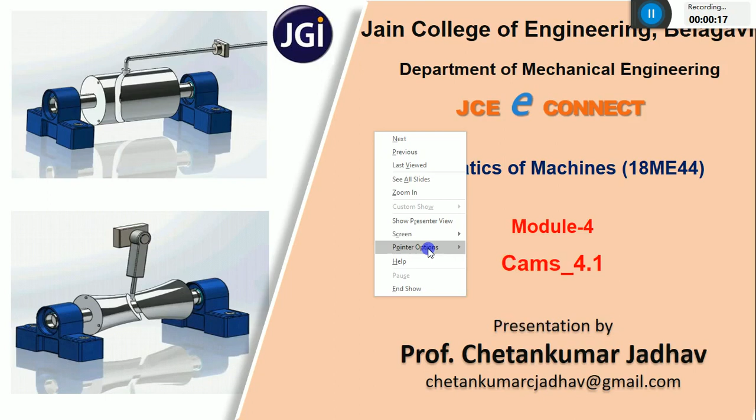Students, today we are going to start with the fourth module, that is CAMS, and this will be your first lecture on module number 4. In this, we are going to discuss the definition of CAM follower, and after that, a detailed classification of these CAM and follower.

So you can see, towards the left side of the screen, these are examples of cam followers. You can see this cylindrical element which is rotating, which is having a groove, so it is one type of a cam. And you can see one more element which is reciprocating in left and right direction, which is nothing but a follower.

Here also you can see this image, it is also an example of a cam and follower, but the shape of the cam is in the form of a concave shape with one groove, and with respect to that groove there is an oscillating element, which is nothing but a follower. So in the first image the follower is reciprocating, and in the second image the follower is oscillating.

Based on different criteria, based on the type of motion of the follower or the shape of the cam and follower, we are going to discuss different classifications of these cam and follower. Okay, let me start with today's lecture.

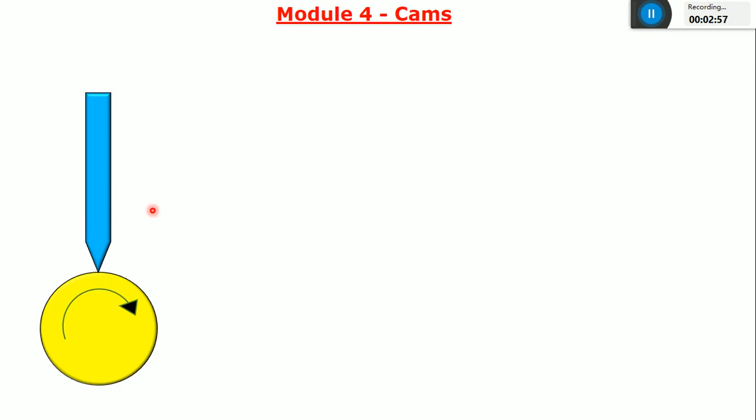Just tell me, what happens if element 1 starts rotating - will there be any motion of this follower? Since the shape of this element is circular, and element 2 is in contact with this circular element, there will not be any movement of this follower. If you give an input to element 1, it will start rotating - the input motion is rotating type. But what about the output? There will not be any output, or motion of this follower, because the surface in contact with the first element is in the form of a circle.

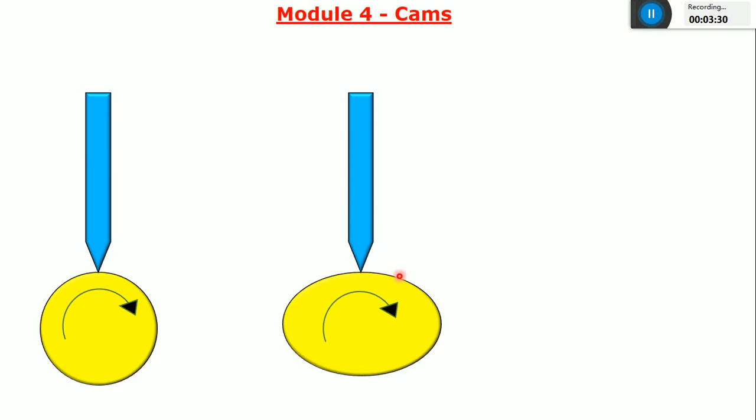In the second image, instead of a circular element, I'll consider an elliptical element. It is also connected to a motor. Again I'll consider this as element 1 and this as element 2. In this case, when element 1 starts rotating, due to the non-circular nature of this element, the follower starts moving in upward and downward direction.

Just consider one point, point A, on this elliptical element. As element 1 starts rotating, this point A moves towards the follower - I'll call this the cam and this the follower. As the cam starts rotating, point A starts moving towards the follower, and due to the non-circular nature of this element, the follower starts moving in upward direction. As point A starts moving away from the follower, the follower will come down.

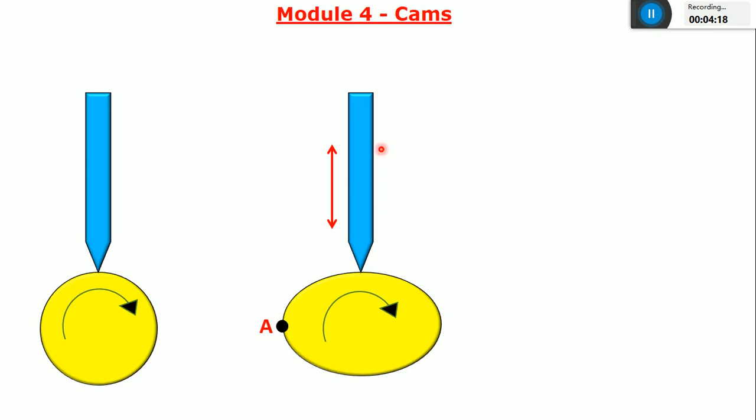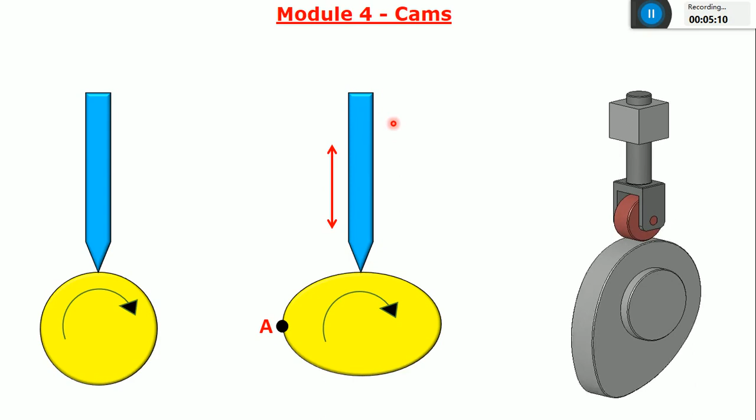As point A starts moving towards this follower, the follower will move upward. As point A starts moving away from the follower, the follower starts moving downward. So this is nothing but a cam and follower - I can call this the cam and this the follower.

So whatever you saw in the first image is not an example of a cam and follower, because the shape of that element is circular, and as this circular element starts rotating, there will not be any movement of the second element. So I cannot call that a cam and follower. If you want to call something a cam and follower, there should be some input motion and there should be some output motion.

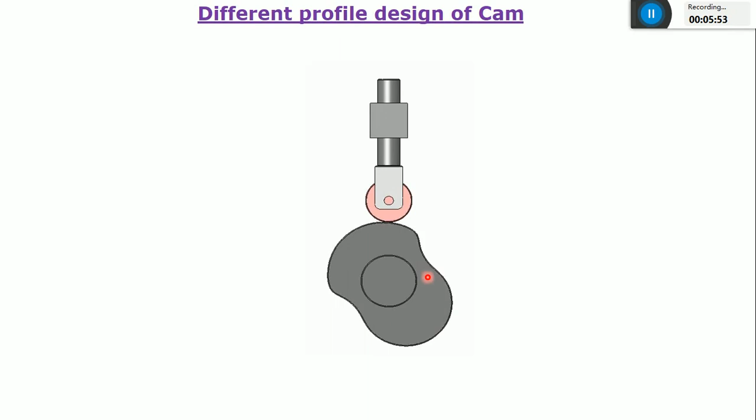So based on the applications and based on the output motion you want, you are going to design the profile, the design of this cam. That is the intention of studying this module number 4. These are the different profiles or designs of a cam based on what output motion is required, what is the speed of the follower which is required.

And if you want a continuous motion of this follower, or in between you want some rest, you can see the follower in the first image will move in upward direction, again come down, take rest, again move up, down, take rest. But in the second image there's a continuous upward and downward motion of the follower. So based on the requirement of the follower, you are going to design the shape of the cam.

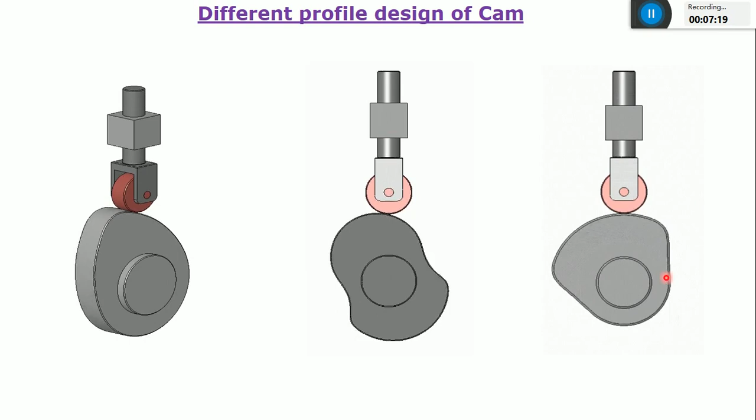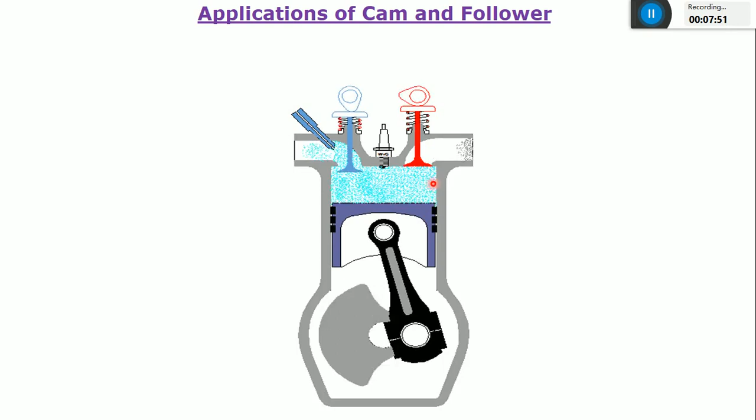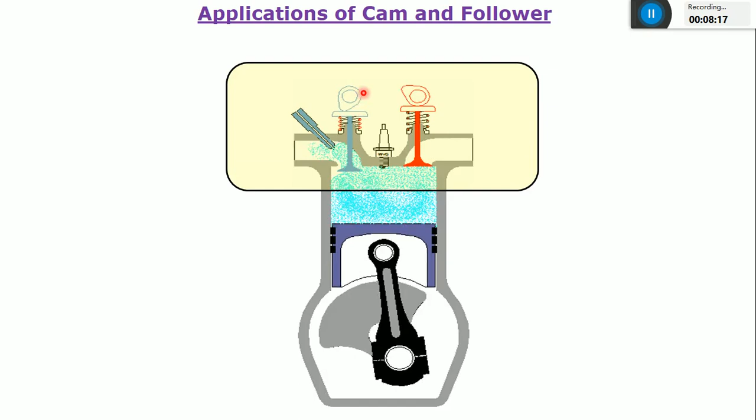So these are the inlet port and outlet port, controlled by the inlet valve and the exhaust valve. And the movement of this inlet valve and outlet valve is in turn controlled by a cam and follower. You can see in this highlighted portion this is nothing but a follower and this is a cam. Again this red colored one, this is also a follower and this is also a cam.

During the suction stroke of this IC engine, the inlet valve will be opened, and at the last stroke, the exhaust stroke, the exhaust valve will be opened. It means you are controlling the motion of the inlet valve and exhaust valve with the help of cam and follower. This inlet valve acts as a follower and this is the cam. The application is to control the movement of the inlet valve and exhaust valve as per your requirement. You can set the timing when it has to be opened and when closed. So this was one application of a cam and follower.

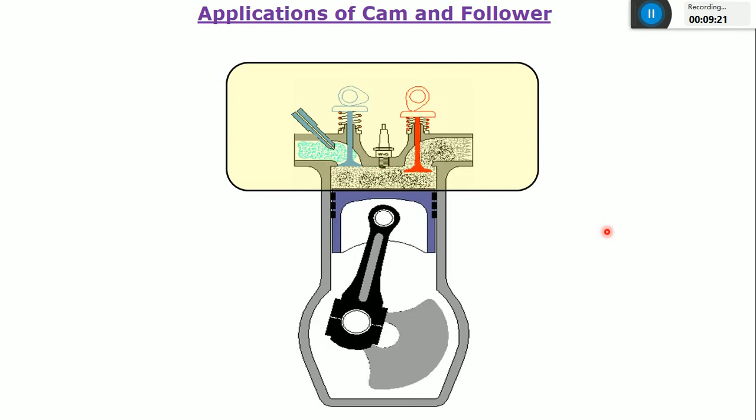There are so many applications of a cam and follower, you can search in Google. In the textile industries, in spinning machines, and in automobiles also, in aeroplanes, and in controlling the feed mechanism of an automatic lathe. All these are applications of cam and follower to control the motion of different parts.

Then after this we'll see what are the different types of motions of the follower. This is nothing but a cam which is connected to a camshaft, and this is a follower. Since the shape of this follower is in the form of a roller, I can call it a roller follower.

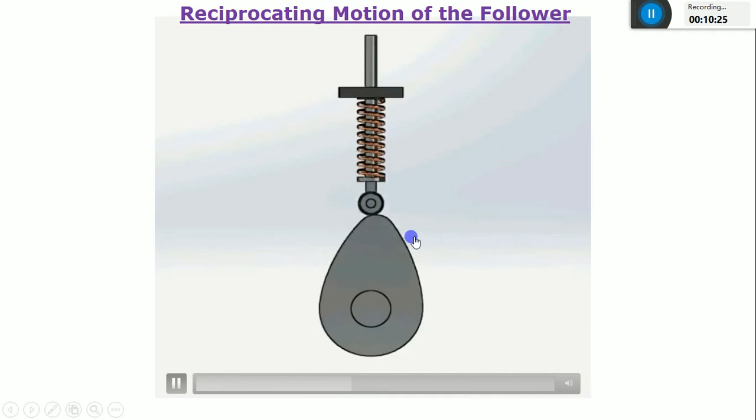Let me show the animation of this cam and follower and why it is called a reciprocating motion of the follower. Just watch this video. The input motion is a rotary path and the output is reciprocating type, the follower moving in upward and downward direction. Since the output motion is in the form of reciprocating type, I can call this particular type reciprocating type cam and follower. Just mainly concentrate on the output motion, what kind of output motion you are seeing - it is in the form of reciprocating type.

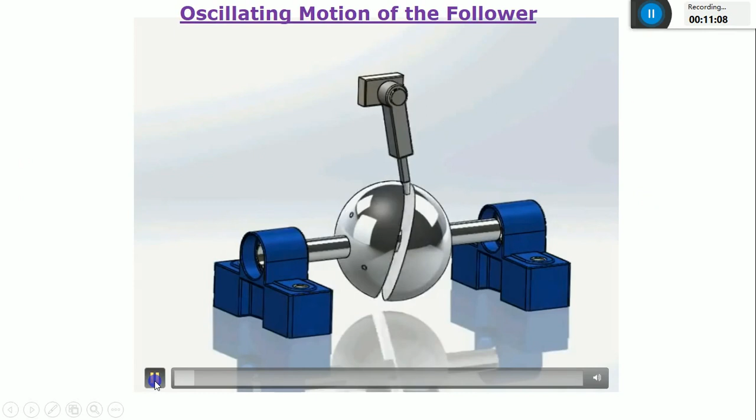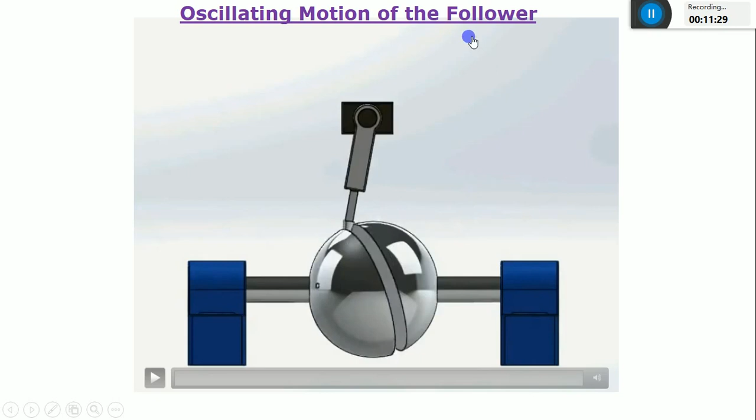I'll consider one more image, also a cam and follower. Just try to concentrate on the output motion, how it is. Just watch this video. The input motion is a rotary path, and the output motion is oscillating type - the follower is oscillating, moving from left to right and right to left. So this particular type of cam and follower is called oscillating type cam and follower. I wanted to differentiate between the reciprocating type and the oscillating type, so that I can define exactly what a cam is.

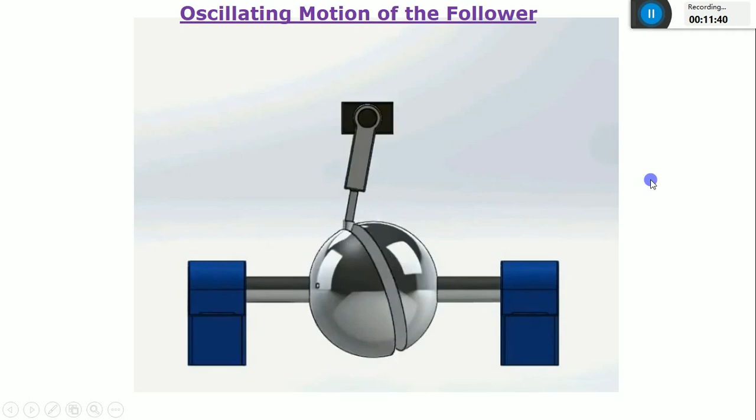So we'll go with this definition of cam. After seeing all these animations, I can see that a cam is a rotating machine element which gives a reciprocating or oscillating motion to another element known as follower. The cam is a rotating machine element which gives a reciprocating or oscillating type of motion to another element. This other element is nothing but a follower. This follower is going to follow this cam. You give the input motion to the cam and the output motion you get from the follower.

And what are the features of this cam and follower? The first one is the cam and follower have a line contact or a point contact and hence form a higher pair. If there is a line contact between two kinematic links or elements, I can call it a higher pair. In this animation you can see the type of contact between the cam and the follower is a line type, so the type of pair is a higher pair. This is one of the features of this cam and follower.

And one more feature is that the contact between the cam and follower is always maintained with the help of a spring force and the self weight of the follower. In this animation the spring is not visible, so I'll show one more animation so it will be clear.

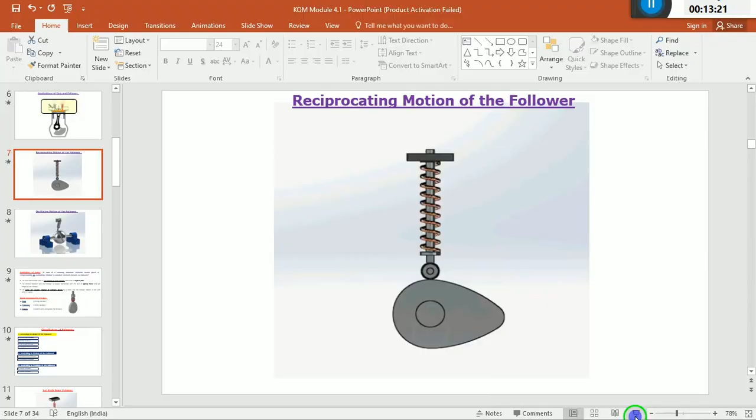You can see in this slide the reciprocating motion of the follower. The contact between the cam and the follower is maintained with the help of a spring force. There is a spring attached to this follower, so that I can maintain a constant contact between the cam and the follower. That is the use of this spring force.

You can see the cams are usually rotated at uniform speed. From the animation you can see the motion of this cam is uniform, moving with uniform speed. But the follower motion is not uniform speed. The follower will not be moving with a constant velocity. Sometimes it will be moving at 5 centimeters per second, sometimes it will be at rest, sometimes it will be 1 centimeter per second.

It means the cam will be having a uniform speed, but in the case of the follower it is not uniform. After that, what are the basic components of this cam? The cam and follower has three basic components. The first one is the cam, which is nothing but a driving member, since the input motion is connected to this cam. The second element, the follower, I can call a driven member, because the motion of this follower is controlled by the cam. Hence the follower acts as a driven member.

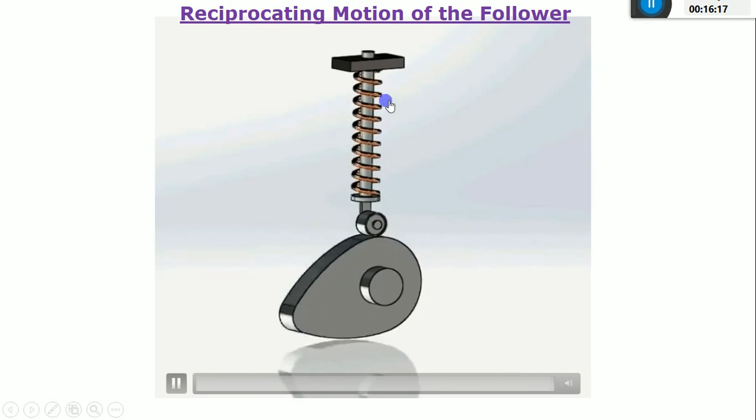And these are the features of this cam: the cam and the follower have a line contact, and the contact between these two is maintained with the help of a spring. This cam rotates with uniform speed, but in the case of follower it has a non-uniform speed. And these are the three basic elements of this cam: the first one is the driving member, the second one is the driven member, and the third one is the supporting member, which acts as a guiding element.

And if you want to see the actual image of this cam and follower, I'll open this PDF.

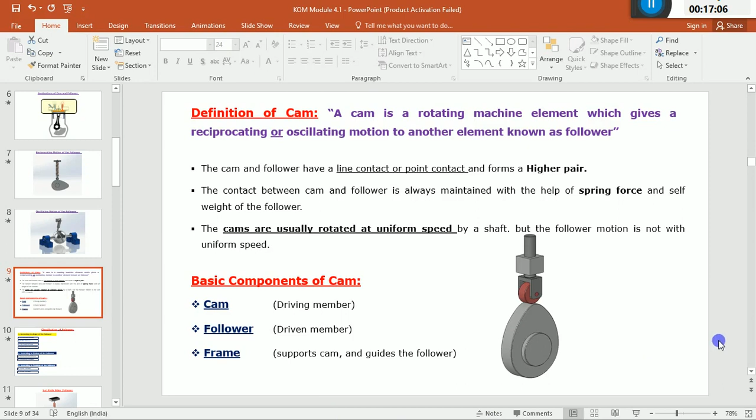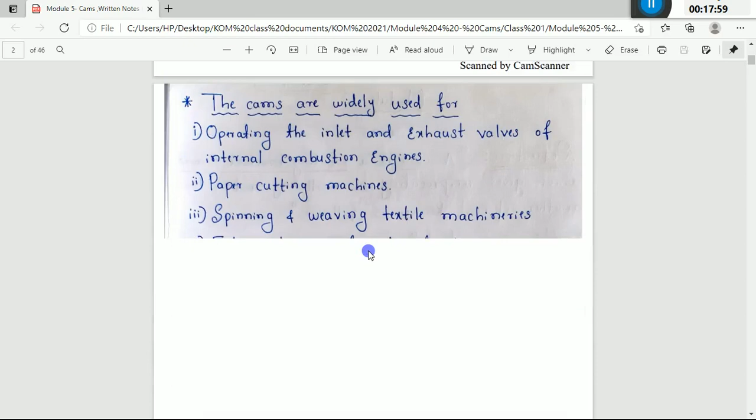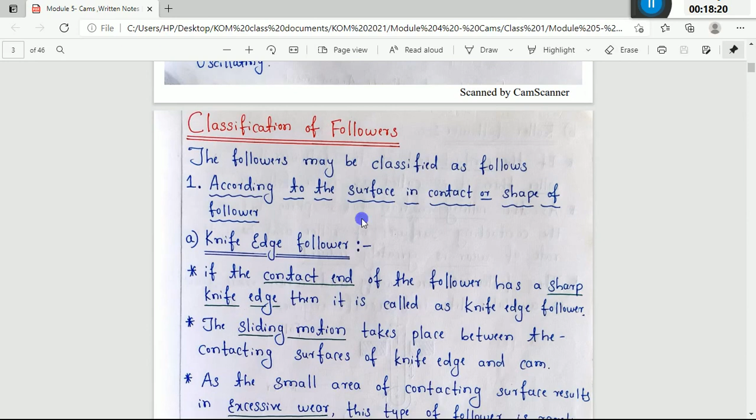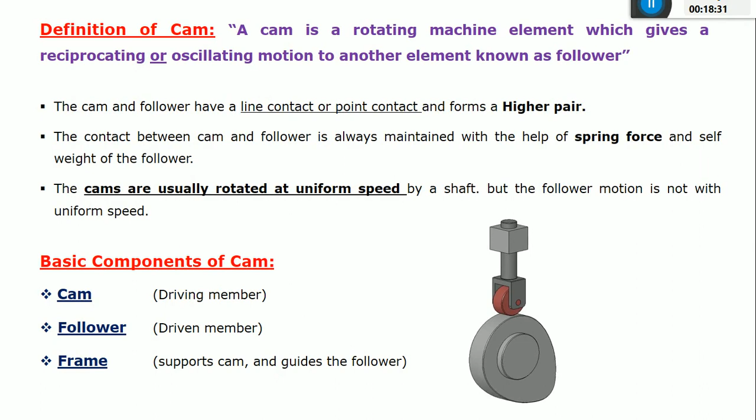Students, just note down different classifications of the follower. According to three criteria, I'm going to classify the followers as a knife edge follower, a roller follower, a flat faced follower, and a spherical faced follower. So all this comes under classification according to shape of the follower.

Based on what is the shape of the follower: if it is a knife edge, I'll call it a knife edge follower. If it is a roller, I'll call it a roller follower. And if the shape of the follower is in the form of a flat face, it will be the flat faced follower. And if it is slightly spherical shape, I'll call it a spherical faced follower. Please note down these classifications so that in the next slide I'm going to start with this knife edge follower.

So first I'll go with the knife edge follower. I'll show some animated videos so that it will be clear. Just take 30 seconds and note down the different types of followers based on three criteria: first, according to shape of the follower; second, according to the motion of the follower; and third, according to position of the follower.

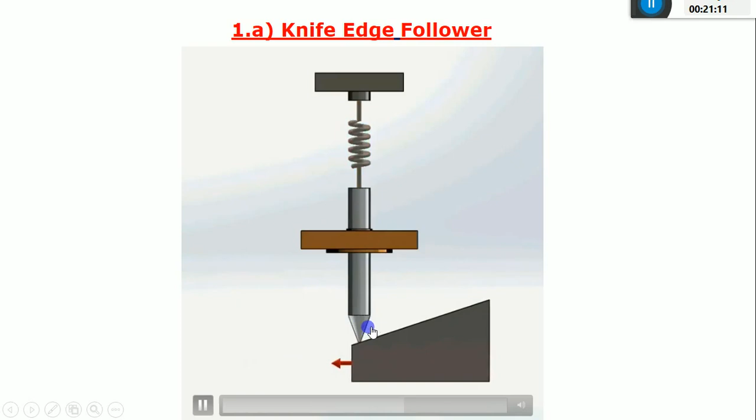You're seeing the input motion is reciprocating, the output is also reciprocating. Why is it called a knife edge follower? Because the shape of this follower is in the form of a conical shape or a knife edge. So I can call it a knife edge follower. It means if the contact end of the follower has a sharp edge, then it is called a knife edge follower.

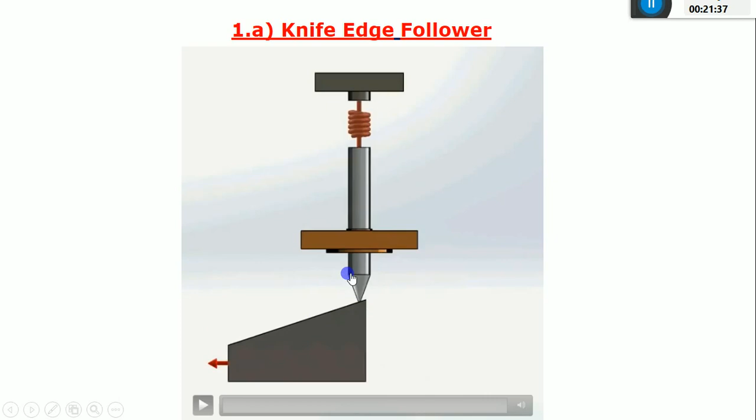And you can see the sliding motion takes place between the contacting surfaces of the knife edge and the cam. There is a sliding motion between a follower and the cam. And since it is having a knife edge, there may be chances of excessive wear, because as a small area of the follower is in contact with this cam, there are chances of wear and tear of the cam as well as the follower.

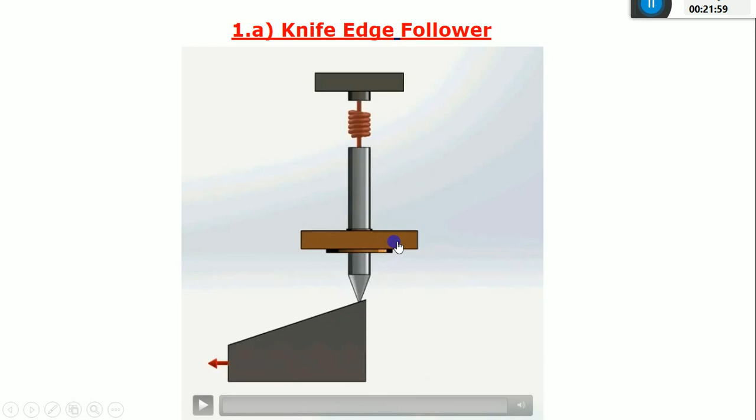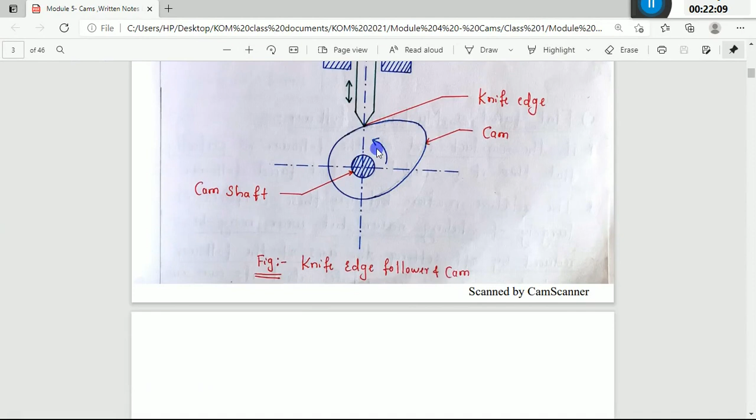And if you want the actual image of this knife edge follower, you can go with this one. In the examination you can draw this one. So this is nothing but a cam, connected to a camshaft. It may be rotating either counterclockwise or clockwise. And to this cam there is a follower which is in the form of a knife edge, so I can call this a knife edge follower.

And the type of contact is a point contact. Since it is having a sharp edge, there may be wear and tear of this cam profile, cam surface. Again, the type of input motion is a rotary path, and the output motion is reciprocating type. So this is the first one. If you want, you can take this image, otherwise after the class I'll share this PDF in the Google Classroom.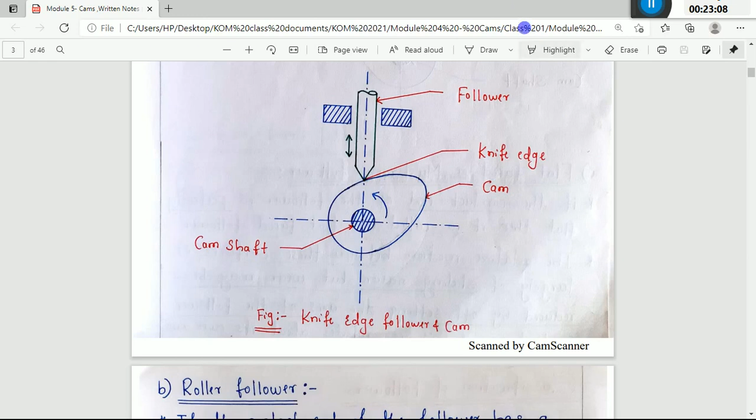After this, I'll start with the next one, that is a roller follower. You can see in this image the type of follower is in the form of a roller.

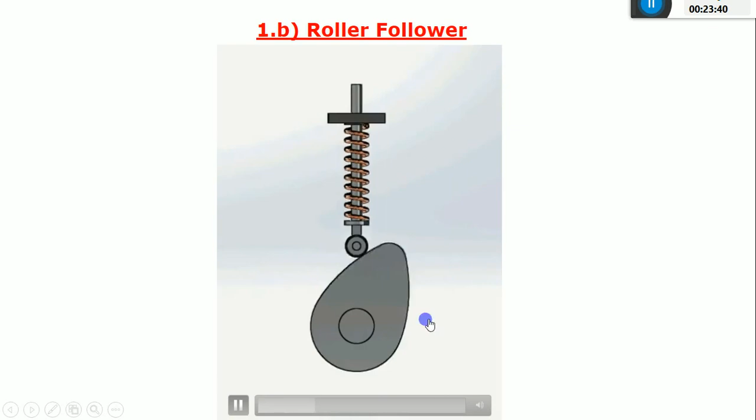First I'll show the video so that it will be clear. Again, the type of input motion is a rotary path, and the output motion is a reciprocating type. But the difference is the shape of this follower is in the form of a roller. It means if the contact end of the follower has a roller type, then it is called a roller follower.

Compared to the knife edge follower, the wear and tear is less, because the type of contact is in the form of a line contact, and it is having a roller shape. The wear and tear of this roller follower and the cam is less compared to the knife edge follower.

These followers are widely used in aircraft engines. These roller type of followers are used in aircraft engines.

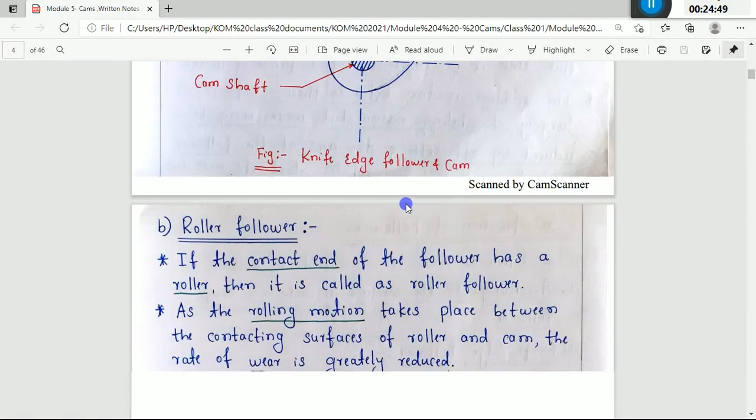If you want the actual image, the schematic image of this follower, you can see in this image. So this is nothing but a roller type of follower. Again this is a cam, and this is a camshaft which is connected with a motor, and this is the follower, and at the end of this follower there is a roller which is in contact with this cam.

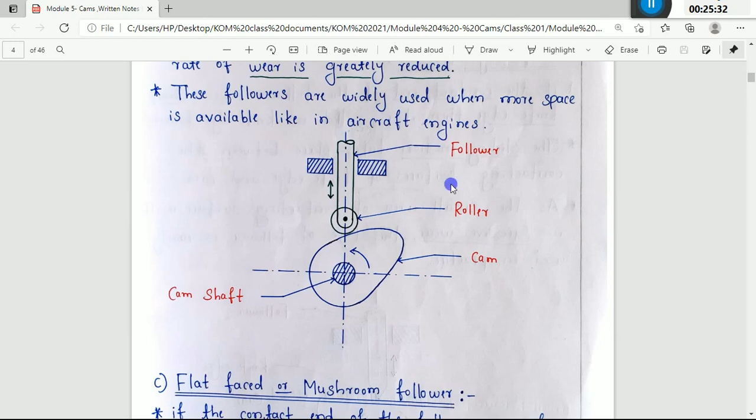Since the type of contact is roller type, the wear and tear is less compared to knife edge follower, and it is used in aircraft engines to control different motions of different mechanical elements. So you can use this in aircraft engines. This is about the second one, that is a roller follower.

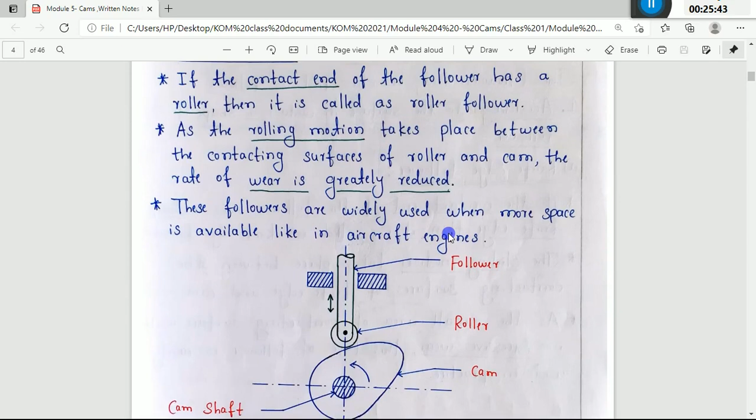Just wait for a second.

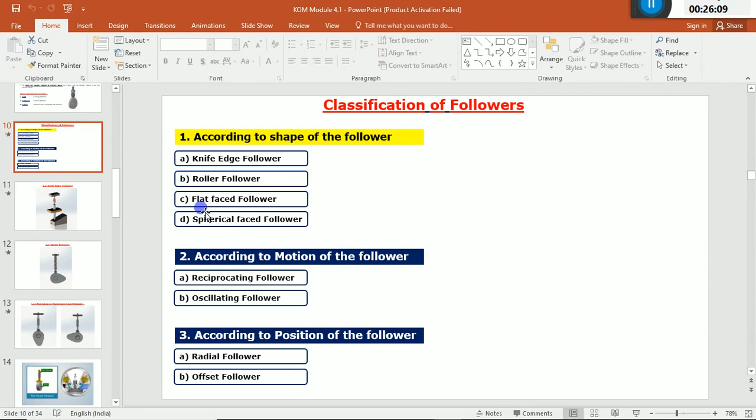So after completing the knife edge follower and the roller follower, we will go with the next classification, that is a flat faced follower. So these are nothing but a flat face or mushroom type of follower. This is the third classification of the first criteria.

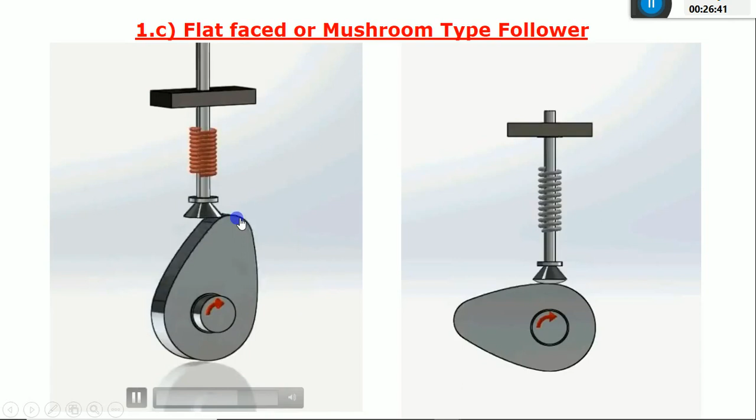In this image, again you can see an animated video. The type of input motion is again a rotary type, and the output is reciprocating. But I'll concentrate on the shape of this follower. Since the shape of this follower is in the form of a flat face, so I can call it a flat faced cam follower.

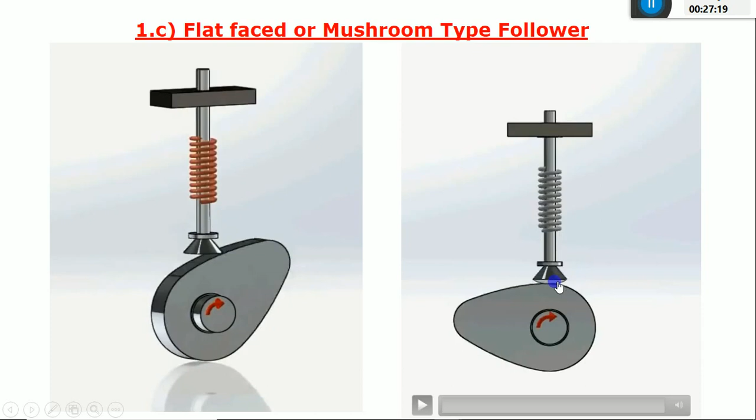If you want, you can see one more time. The shape of the follower is in the form of a conical shape with a flat surface. If you're going to modify this flat face slightly with a circular path or a curved path, it is also called a mushroom type. If you're going to modify this flat faced follower with a small curvature at the end, it'll become a mushroom type of follower.

Both are same, only a small modification in the curvature. Instead of a flat face, it is having a small curvature. Again, the working principle is same: the input is a rotary path and the output is reciprocating type.

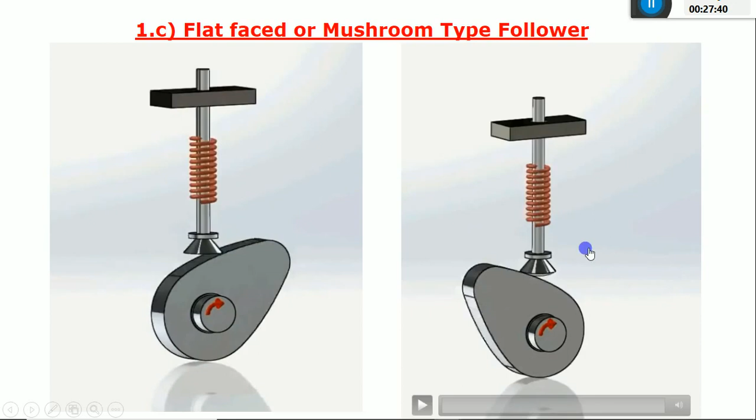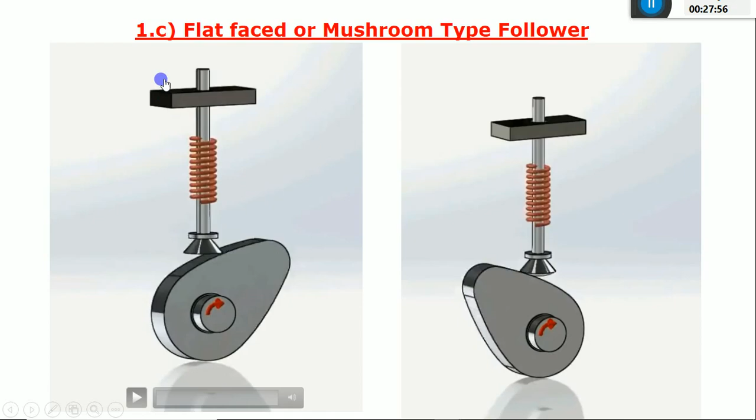If you want the actual image of this flat faced follower, you can go with this one. In the examination you can draw this one. The explanation is again same, only you are concentrating on the shape of the follower. If the contact end of the follower is perfectly flat, then it is called a flat faced follower.

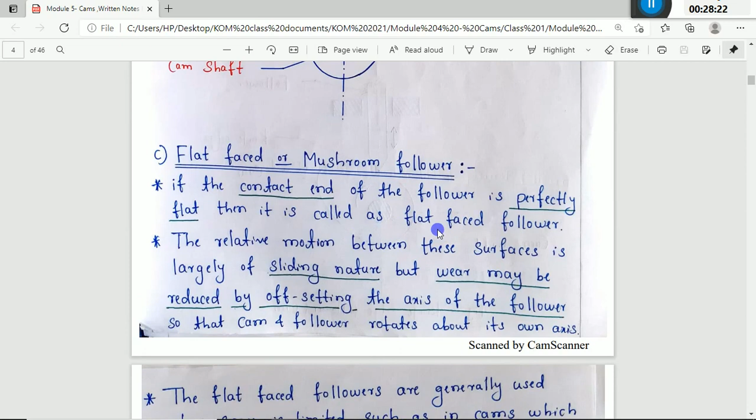Compared to the knife edge follower, the flat face follower is having more wear and tear, because a larger amount of this follower is in contact with the cam. It means the relative motion between these surfaces is largely of sliding nature.

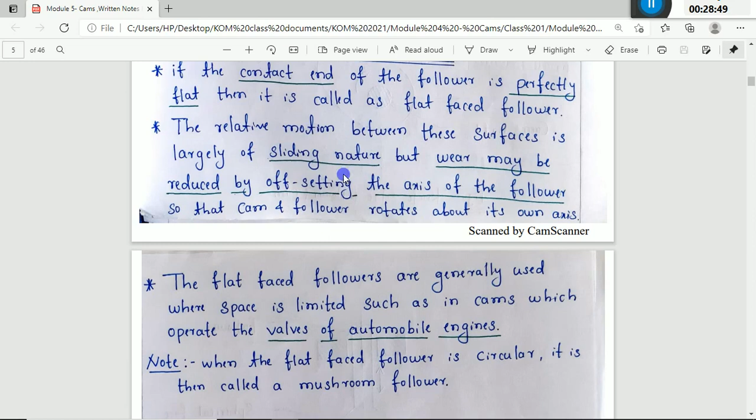You can see the size of this flat face follower is more compared to the knife edge follower. Hence the type of contact is again the sliding type, hence the wear and tear is more. To avoid that, slightly you can offset this follower. You can change the axis of this follower with respect to the center of the cam rotation. Since in this case both are in the same line, slightly you can do the offset of this follower and you can reduce the wear.

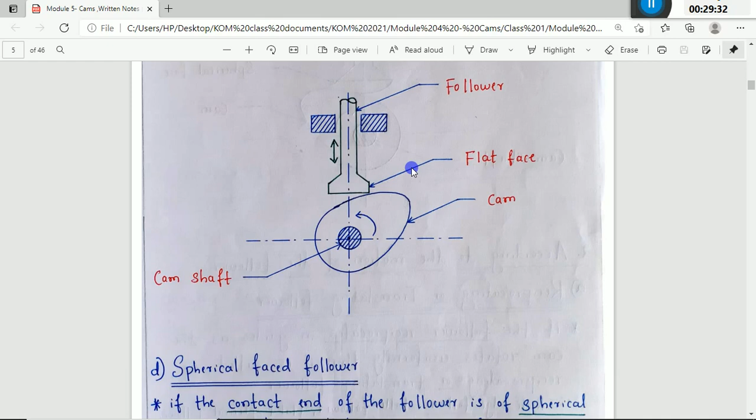This is about the third one, that is a flat faced or mushroom type of follower. And if you are going to go with the next one, that is a spherical faced follower.

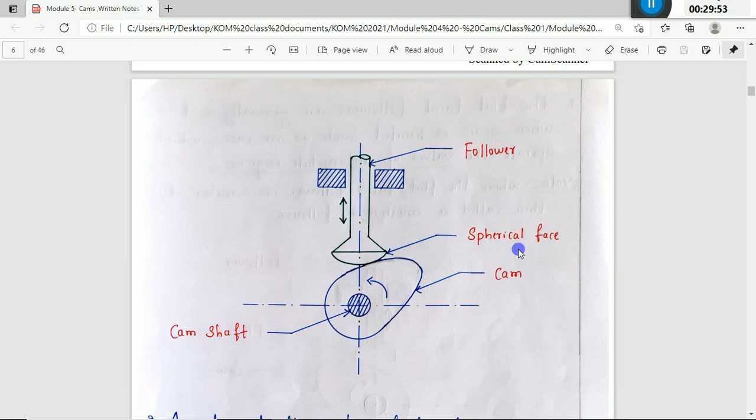You can see in this image it's similar to a flat faced mushroom follower, but the shape of this follower is in the form of a sphere or a spherical face. The shape is spherical, that's why it is called a spherical faced follower. It means if the contact end of the follower is of spherical shape, then it is called a spherical faced follower.

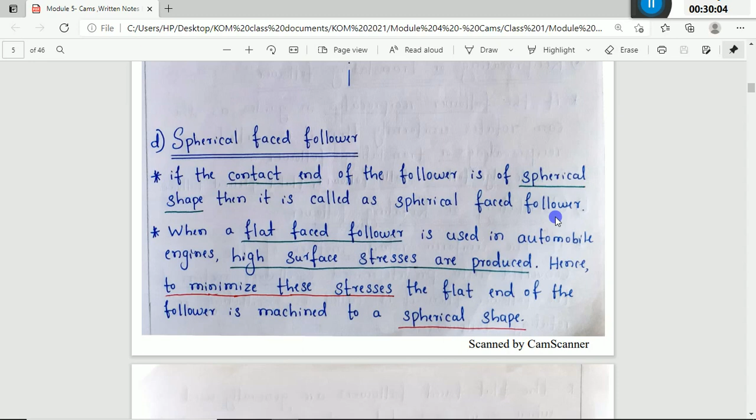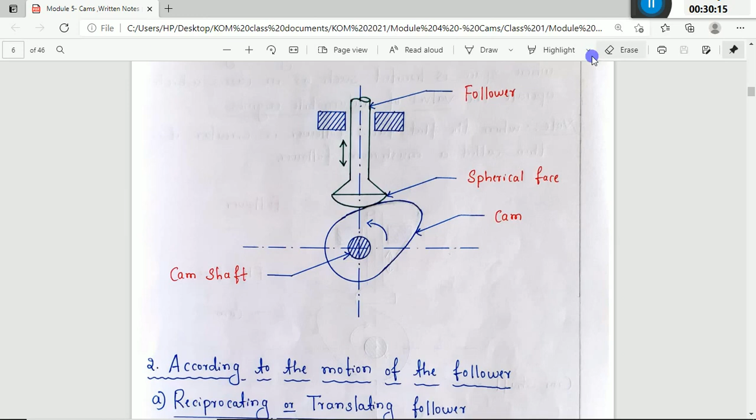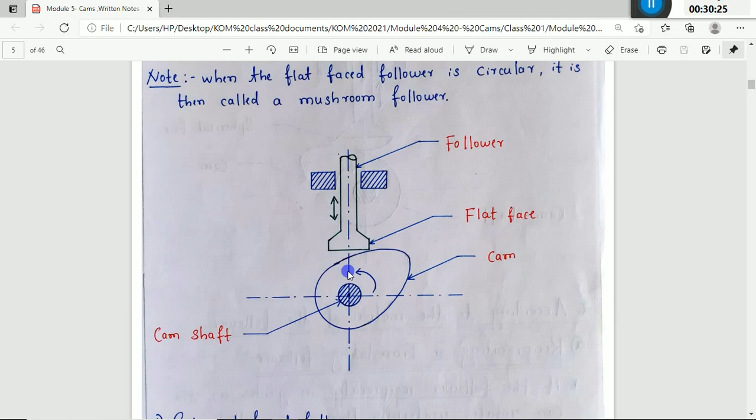This is utilized to reduce the stresses which are generated in the flat faced follower. Since in the case of a flat faced follower, the wear and tear is more, and there may be chances of induced stresses in the cam. To avoid that, this spherical faced follower is used.

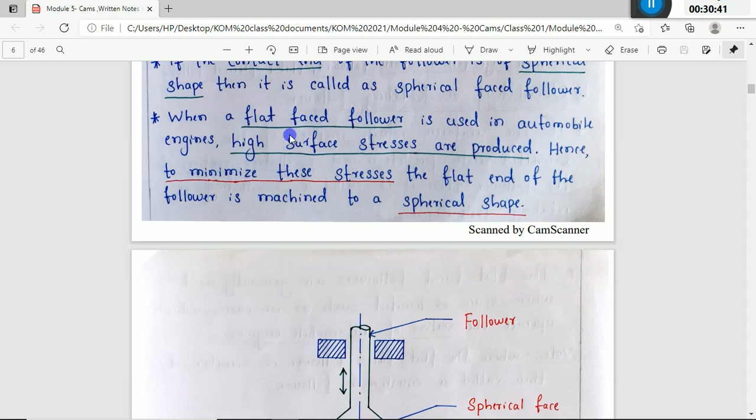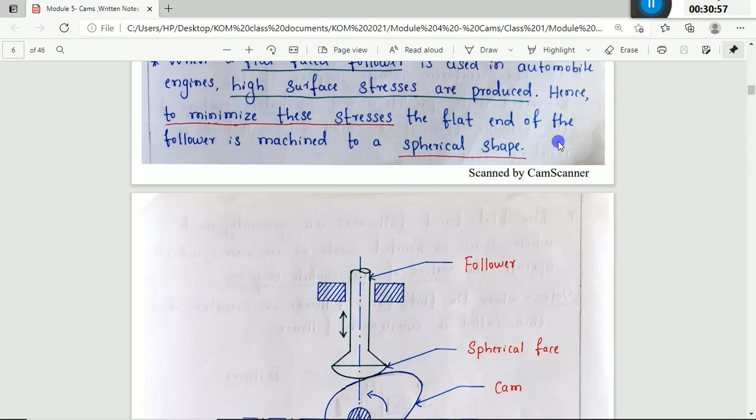When a flat faced follower is used in automobile engines, high surface stresses are produced. The stresses which are produced in the cam profile are more in the case of a flat faced follower. To avoid that, to minimize that, we are using this spherical shaped follower. It means to minimize these stresses of the flat end of the follower, it is converted into spherical shape; that is the only modification. This is about a spherical faced follower. If you want the animation, you can see this.

And since it is having more wear and tear and more surface contact, which is in the form of a sliding motion, to avoid that we are going with the next one, that is a spherical faced follower. So as explained, you can see the shape of this follower is in the form of a sphere. You can say as a hemisphere.

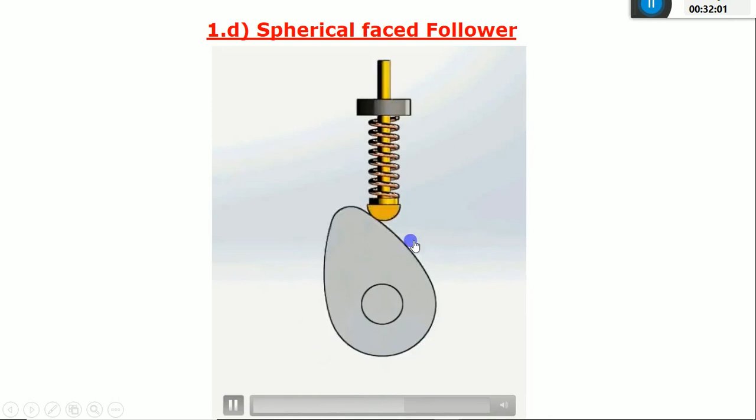Okay, you can see better animation. Again, the working principle is same, but only the shape of this follower is in the form of a sphere, or you can say as a hemisphere, so that you can minimize the stresses which are going to induce in this cam. It is also used in automobiles. So this is the application of this spherical follower. So this is a spherical follower, instead of a flat follower, it is replaced by a spherical shaped follower.

So by using this one, we can minimize the stresses which are going to induce in the cam as well as in the follower. So that is the only difference between a flat faced follower and a spherical faced follower.

After this, we'll go with the second classification according to motion of the follower. Okay, please note on this one. According to the type of motion of the follower, we are going to classify the cam and follower as a reciprocating type, and one more is oscillating type. Please note down the second one. This is the second classification, that is a reciprocating follower and oscillating follower.

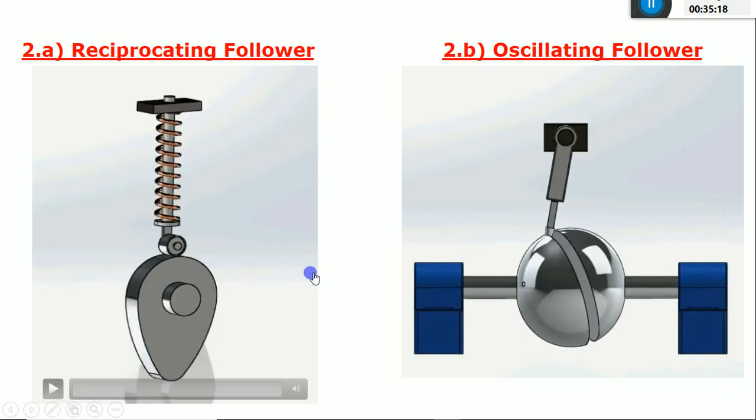And if it is clear, I'll go with the next one, that is according to the position of the follower. So according to the position or the axis of the follower, I'm going to classify as a radial follower and offset follower. Please note down these two. I'll try to differentiate what is exactly a radial follower and offset follower. So this is the third classification, based on the position of the follower. First one is the radial and the second one is offset follower.

So this one is nothing but a radial follower. What is exactly a radial follower means? The axis of this follower is in line with the center of the cam. So this is the center of the cam, correct? It means if the axis of this follower is in line with or is along with the center of this cam rotation, so I can call it as a radial follower. Also you can see the direction of the motion of this follower is perpendicular to the axis of the cam.

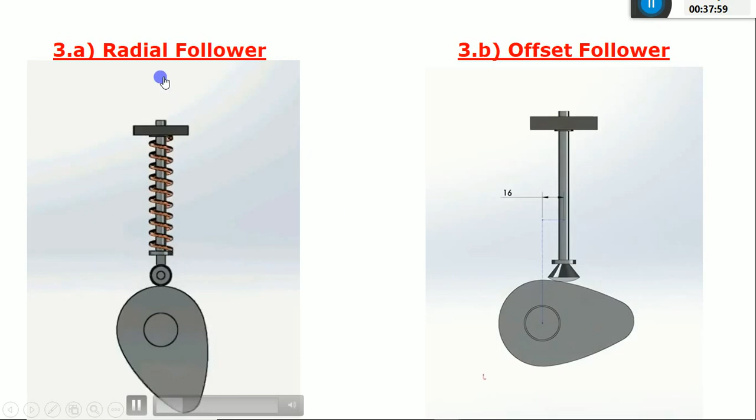If you want animation, you can see it. The axis of the follower is in line with the center of this camshaft, and it is perpendicular with respect to the axis of this follower. In the second animation, you can see there is an offset between the axis of this follower and the center of the camshaft. There is a slight offset.

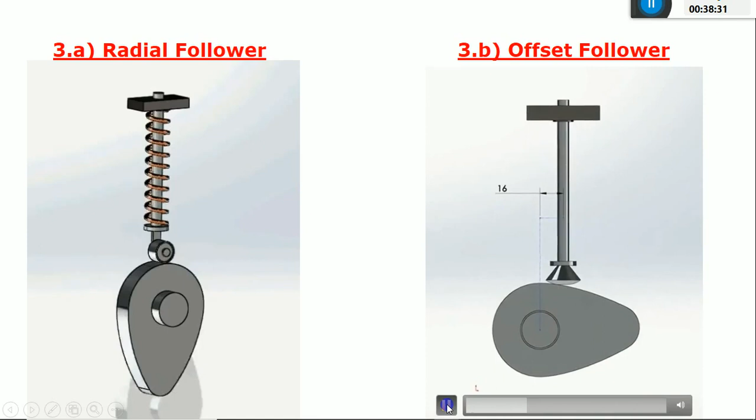That is the only difference.

These followers are also used in the automobile industry or aircraft industry. Based on the space restriction, if the space restriction is very less, you can go with this one. And if the space is more, and if you want to minimize the wear and tear between these two elements, you can go with this offset follower, so that you can avoid maximum contact between these two elements. If there is less contact, there will be less wear. Based on the space restriction and the amount of wear and tear, you can select either a radial follower or the offset follower.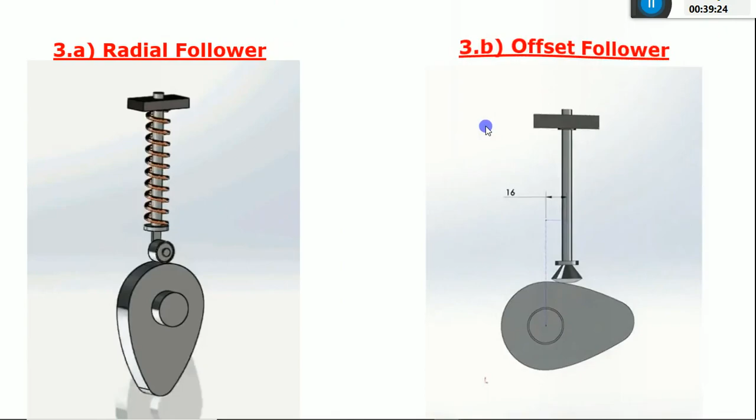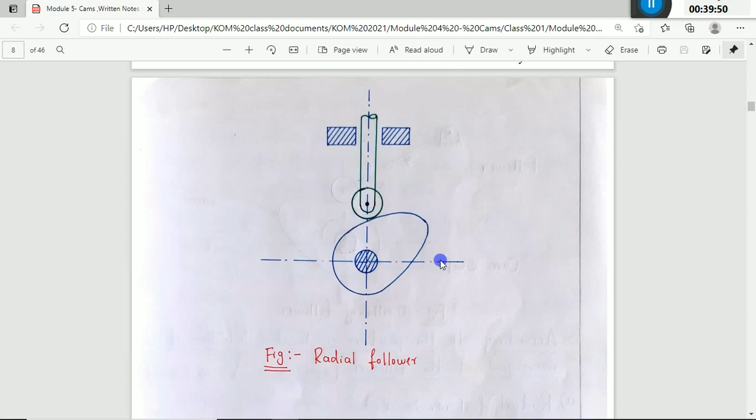If you want the exact animation or the exact image of these two, you can go with this. This is nothing but a radial follower. This is the axis of the follower, which is in line with the center of this camshaft, and this is the axis of the cam. Both are perpendicular. And in the second case, that is the offset follower.

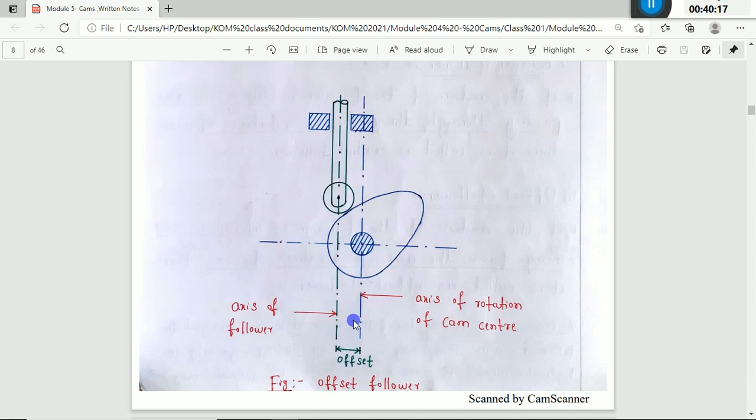There is a slight offset between the axis of the follower. You can see here, this is the axis of the follower, and this is the center of rotation of the camshaft. There is a slight offset towards the left, so I can call it an offset follower. This is about the classification of followers.

And the last one is this one. We completed all three classifications of followers: based on shape, based on the motion of the follower, and the position of the follower. Quickly, I'll revise once again so that if there are any doubts, I can clarify.

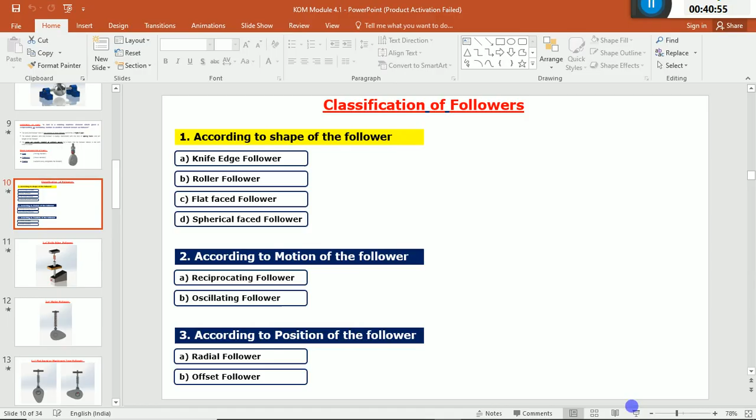The first one is the knife edge. You can see the shape of the follower is knife edge, so I call it a knife edge follower. The second one is a roller type, and it is called a roller follower. The third one is nothing but a flat face or mushroom type.

The end of this follower is perfectly flat, so I call it a flat face. If it is slightly curved in shape, not spherical, I call it a mushroom type.

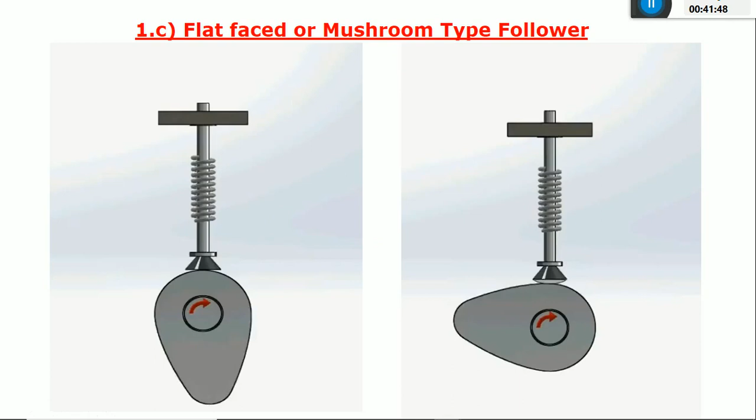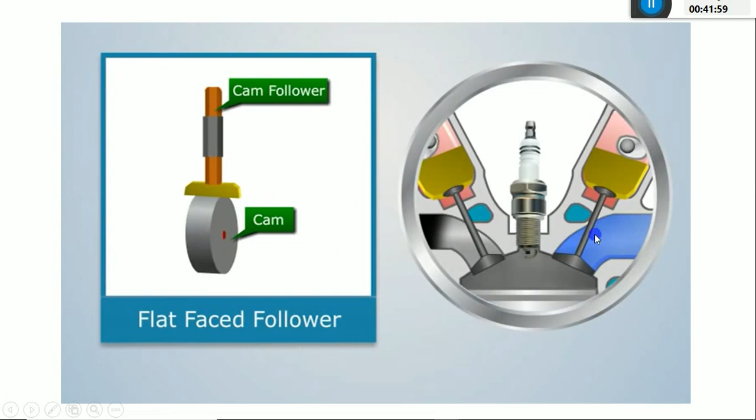These are also used in the automobile industry to control the motion of different mechanical elements like the inlet valve and the exhaust valves. This was the application of the flat face follower, which is used in IC engines to control the motion of the inlet and exhaust valves.

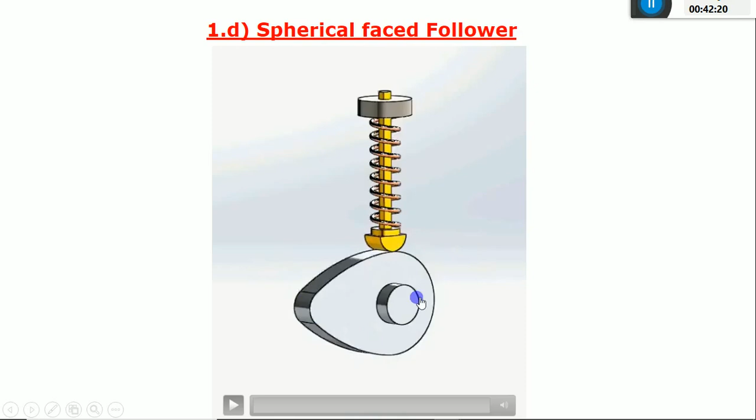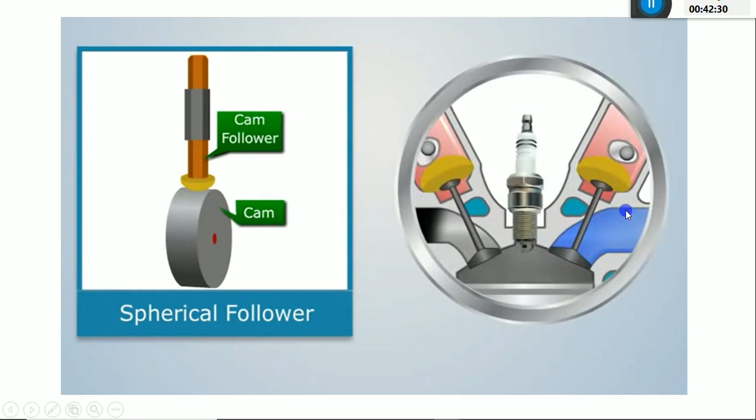The next one was the spherical face follower. The shape of the follower is a hemisphere, so I call it the spherical face follower. To avoid or minimize the stresses that would be induced in the case of a flat face follower, I use this one, the spherical face follower. Again, you can see the application of this spherical face follower in automobile engines.

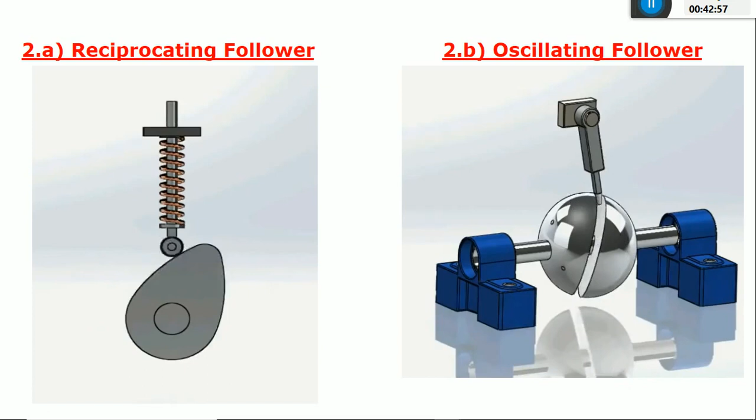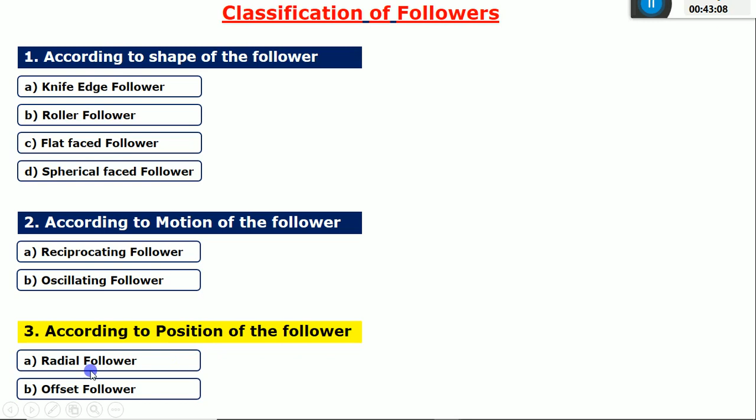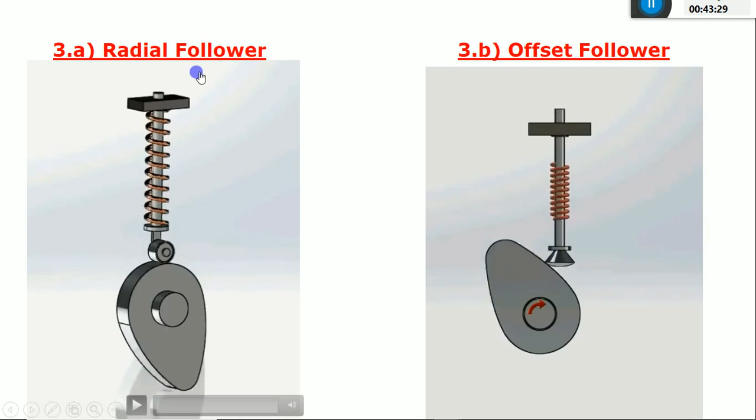After that, we discussed the last one, according to the position of the follower. If the axis of the follower is in line with the center of the camshaft, it is called a radial follower. If it is slightly offset either towards the right or left, it will be called an offset follower. Just remember these two, they are very important from the exam point of view. On this radial follower and the offset follower, you are going to design the cam profile.

This is about today's class. In tomorrow's class, I'll go with the classification of cams on different criterias. Again there are three criterias. So far we have discussed the classification of followers. Next class I'll discuss the classification of cams based on these three different criterias.